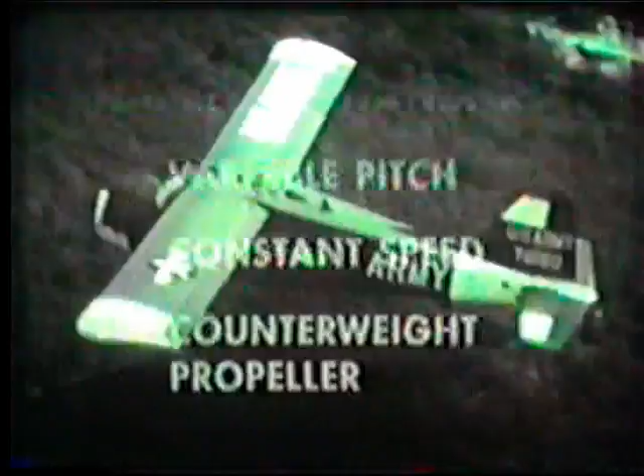The U-6 Beaver is a rugged aircraft with plenty of power for short-field barrier takeoffs. To make the best use of its power, the Beaver is equipped with a Hamilton Standard variable pitch, constant speed, counterweight propeller. First, let's learn why variable pitch is an advantage and how it works. Variable pitch means that the aviator can adjust the pitch of the propeller blades and thus control the amount of work it does.

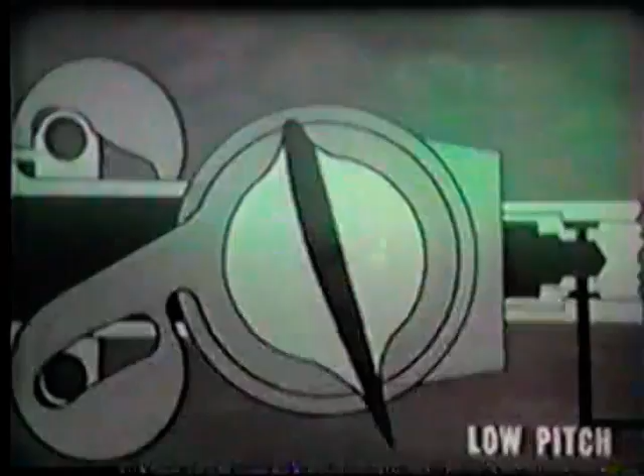With a variable pitch propeller, the Beaver can climb in low pitch or cruise in high pitch. Let's see how variable pitch makes possible efficient use of engine power. When the engine is operating, the blades can be adjusted from low to high pitch, or they can be set at any point between low and high pitch.

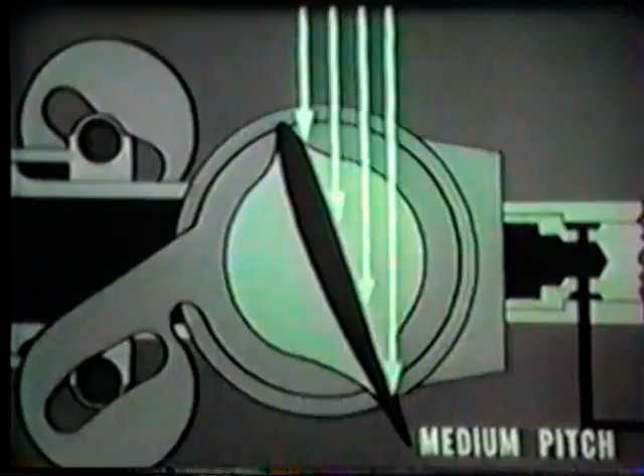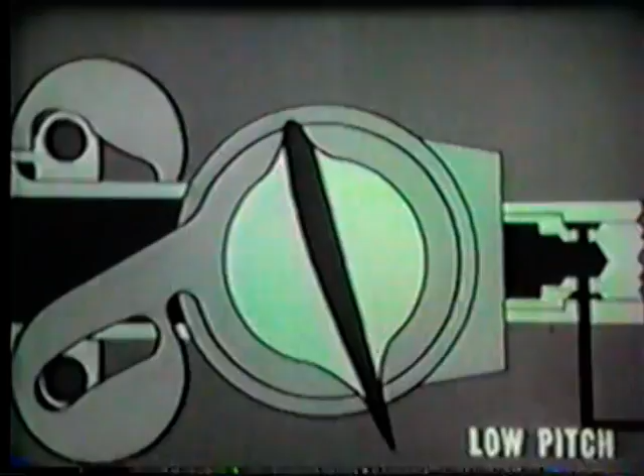When the propeller turns at medium pitch, the air offers a moderate amount of resistance to its movement. If the pitch is low, much less air resistance is offered. And with the blades at high pitch, much more air resistance must be overcome by the blades.

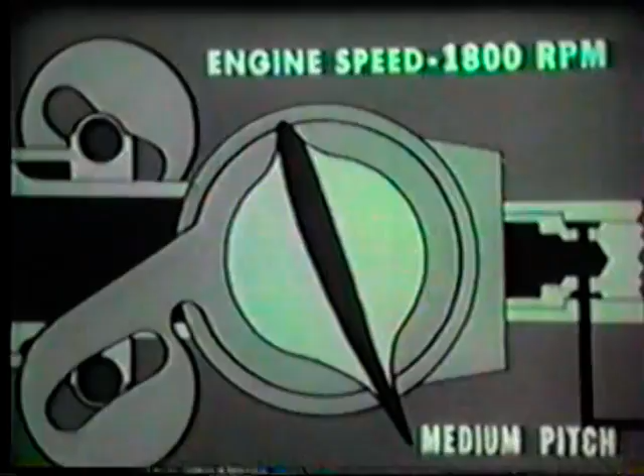Pitch and the resulting resistance of the air to the turning of the blades affects the horsepower output of the engine. With pitch at medium, our engine speed is 1800 RPM. Now, if the pitch is increased to high so that more air resistance must be overcome, the engine speed decreases since the engine must do more work at the same throttle setting.

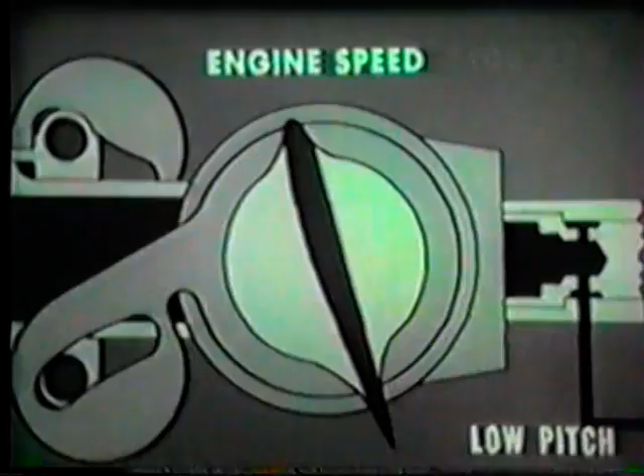With the blades at low pitch, engine RPM increases since the power plant has less work to do at the same throttle setting. The best way to remember how variable pitch is used is to compare it with a vehicle transmission. When climbing a hill, low gear is used to keep engine RPM at a high level, which permits the engine to develop its full power.

When driving on level ground, high gear is used because there is less work to do, and RPM must be kept from going too high.

When a Beaver is climbing, low pitch is used so that engine RPM is high and power output is at its maximum. With a Beaver flying in a level attitude, high pitch is used since there is less work for the prop and the engine would over-rev in low pitch.

Remember this: at the same throttle setting, low pitch produces high RPM and high pitch produces low RPM. This is the key to how variable pitch is used. Now let's find out how it works.

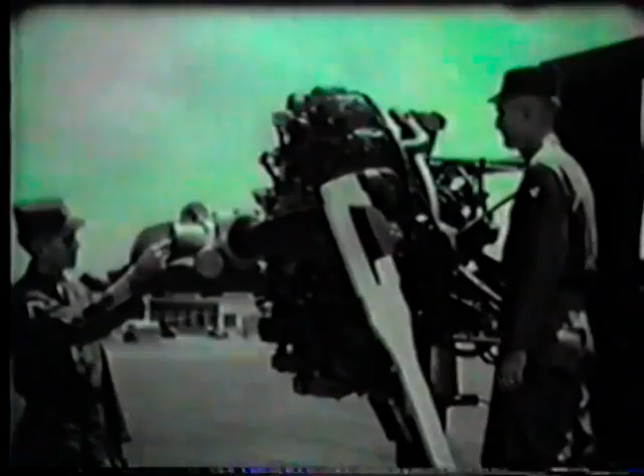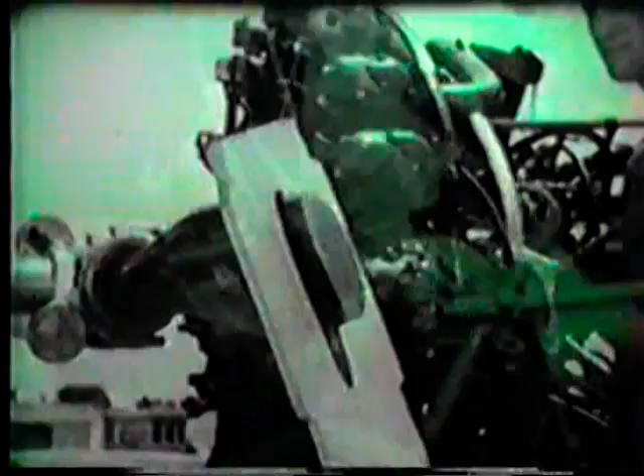On this engine mock-up, the propeller mechanism can be readily seen. There are only two parts: the propeller itself, and on the rear accessory case, the constant speed control, which is commonly called the governor. This governor is geared to the engine.

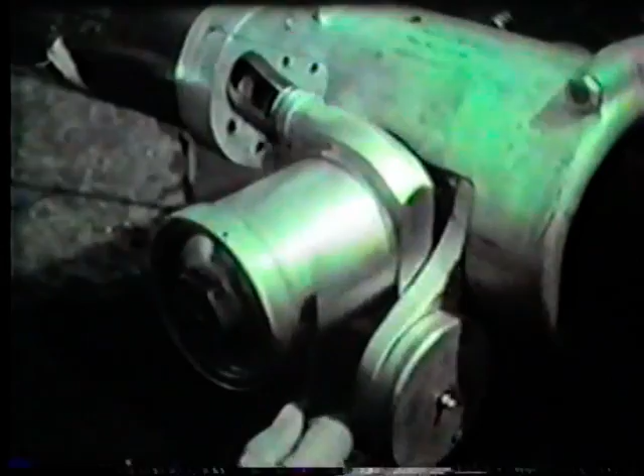Using a blade turning device, we can see what happens when blade pitch is changed. As the blades move to low pitch, this cylinder moves outward, and these counterweights are drawn closer to the cylinder. When the blades move to high pitch, the counterweights move away from the cylinder, pulling the cylinder in.

Two types of forces operate the propeller. Hydraulic force moves the cylinder out, pulling the counterweights in and turning the blades to low pitch. As the hydraulic force is released, centrifugal force of the whirling counterweights pulls the cylinder in and turns the blades to high pitch.

Here is how the combination of hydraulic and centrifugal force operates. The cylinder moves the counterweights by means of short shafts and bearings, which ride in slots in the counterweight brackets. The counterweight brackets are in turn linked to the blades so that as the counterweights move, the blade pitch is changed.

Oil is forced into the cylinder, moving it outward. As it moves, the shafts and bearings ride in the slots in the counterweights, pulling the counterweights in and overcoming the centrifugal force which tends to pull them out. As the weights move in, the blades are turned from high pitch to low pitch. Hydraulic force has overcome centrifugal force.

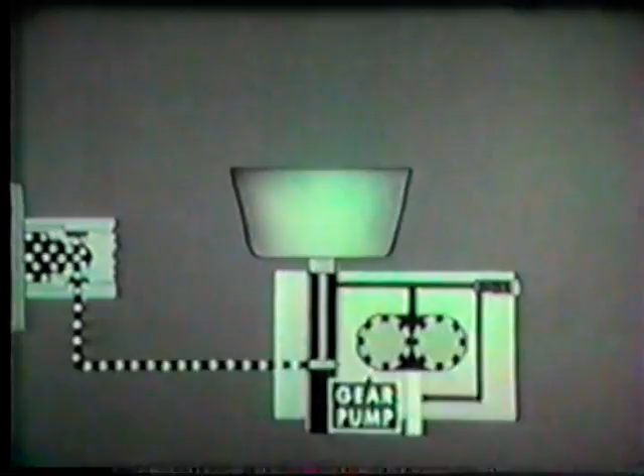Now let's examine the pump and valve mechanism of the governor, which controls the flow of oil to the cylinder. Oil is delivered to the governor at engine oil pressure. In the governor, a gear pump raises the oil's pressure to approximately 180 pounds.

The high-pressure oil moves on to a pilot valve, which controls its flow to the propeller cylinder. When the pilot valve is closed, a relief valve prevents overpressure by allowing oil to escape back to the governor pump inlet. Here is how the pump and valves operate.

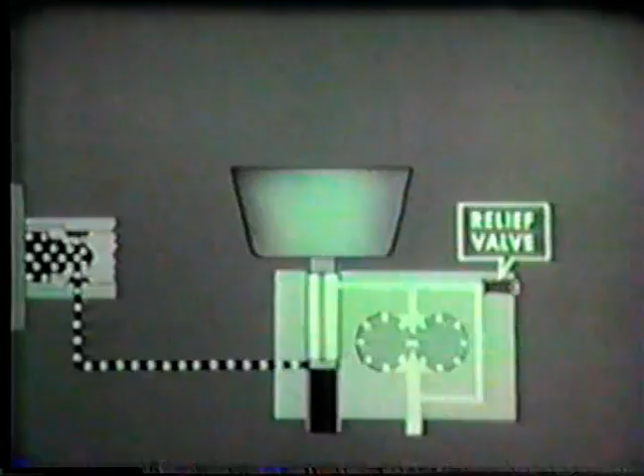With the pilot valve closed, oil does not flow into or out of the cylinder, and blade pitch remains unchanged.

When the pilot valve moves down, oil flows to the propeller cylinder. The relief valve closes.

As we have seen, when oil flows into the propeller cylinder, the cylinder moves out. The counterweights are pulled in and the blades move toward low pitch.

When the pilot valve moves up, past the closed position, oil flows out of the propeller cylinder and back through the governor to the engine. This is caused by centrifugal force on the counterweights, which move out and pull the cylinder in, forcing oil out of it.

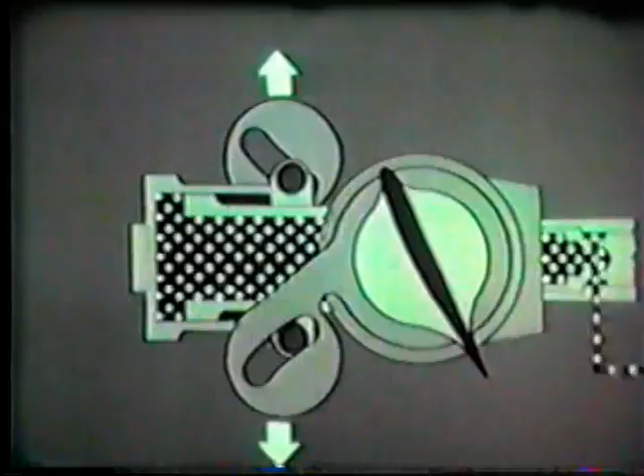Since the pilot valve, which in turn varies propeller pitch, can be controlled from the cockpit, we call the Hamilton Standard a variable pitch propeller.

Next, we will examine its second virtue, constant speed. What does constant speed mean? It means that once the propeller control is set for a specific engine speed, the speed will vary only slightly and momentarily, even though the plane makes a minor climb, or flies through turbulent air, or makes a shallow dive.

Any flight condition which would normally call for a slight throttle adjustment is automatically compensated for. This constant engine speed is a great advantage to the aviator.

In low-level flying, it is necessary to make many adjustments of attitude. However, with a constant speed propeller, the aviator does not have to worry about minor throttle adjustments. His mind is free to concentrate on his other flight controls.

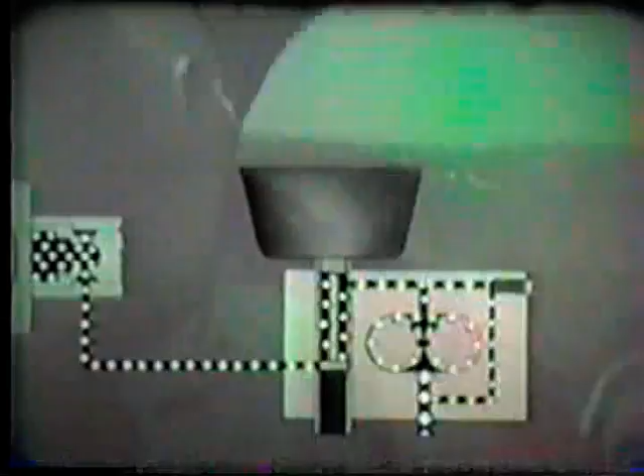We have seen how the pump and valve in the governor changes the propeller's pitch. Now let's add the parts which automatically make these changes.

First, there is a speeder spring assembly, which consists of a spring collar and is attached to the pilot valve shaft, and a spring above it, which puts tension on the pilot valve shaft.

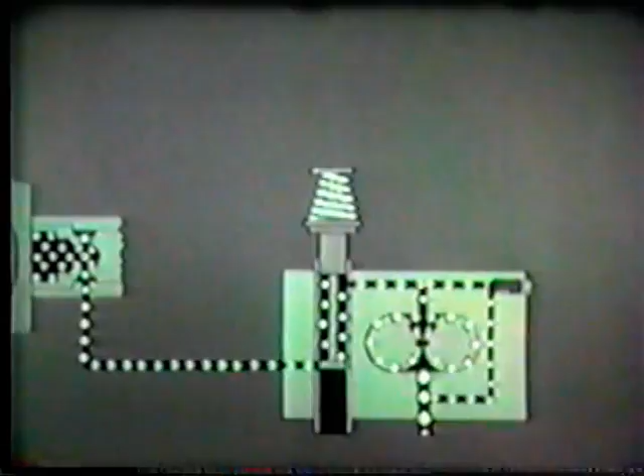Then there are the flyweights mounted outside the speeder spring assembly. Their inner arms rest against the underside of the outer race of the pilot valve bearings.

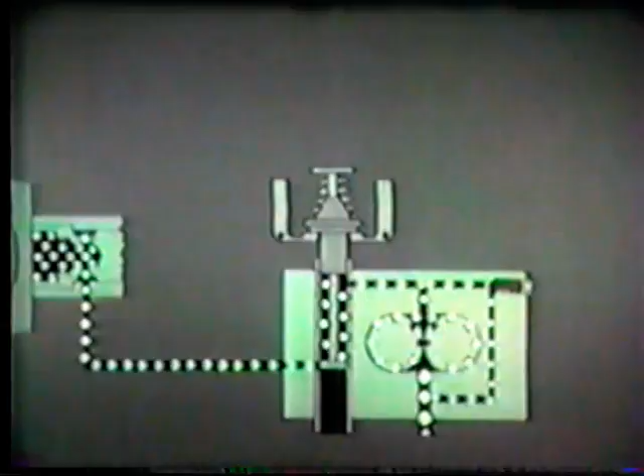In operation, the gear pump, outer race of bearings, and flyweights all revolve at the same speed. The centrifugal force of the whirling flyweights is pushing up against the speeder spring just enough to hold the pilot valve closed.

The condition we see here is called an on-speed condition. The propeller is holding pitch without variation. This means the beaver is flying straight and level.

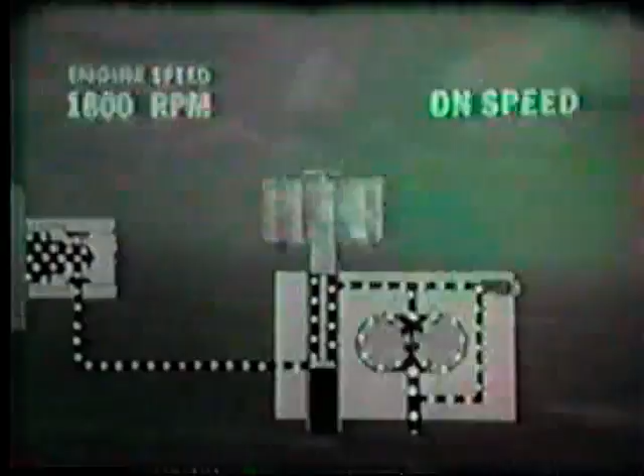Now it starts to climb slightly. Engine RPM starts to drop as the plane climbs. At the same time, the flyweights slow down and lose centrifugal force.

Since they do not push so hard against the speeder spring, the spring expands. The pilot valve moves down and oil is pumped to the propeller cylinder. The blades move to a slightly lower pitch.

Since at low pitch the propeller has less air resistance to overcome, the engine turns more easily and regains its original RPM. The flyweights also speed up, developing more centrifugal force. Once again, they compress the speeder spring and close the pilot valve.

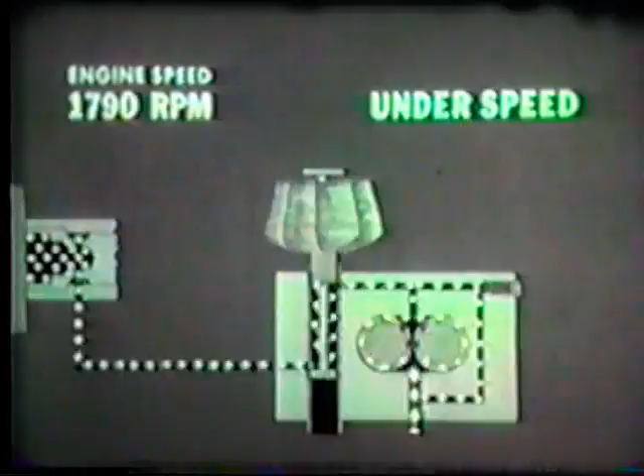The cycle we have just seen, with engine RPM dropping, pilot valve open, and oil flowing to the propeller, is called an underspeed condition, since the engine RPM falls below its original setting.

Now let's watch the action as the Beaver goes into a shallow dive. With the plane descending, there is less work for the engine to do, so it tends to gain RPM.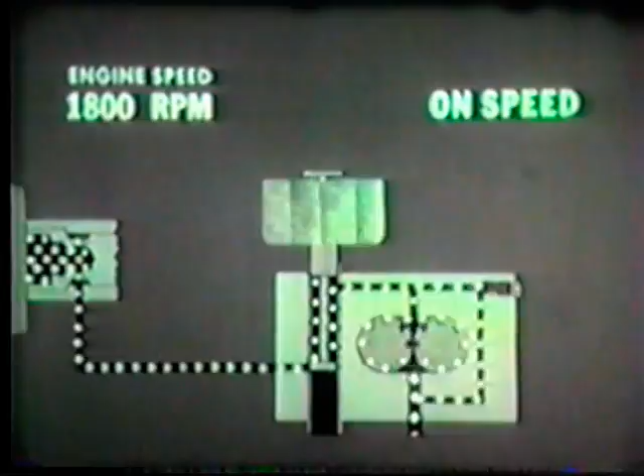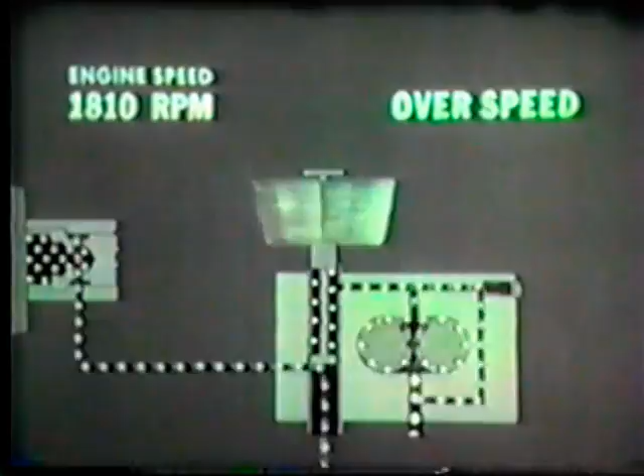Here is how the governor automatically returns the engine to its set speed. As engine RPM increases, governor speed also increases. Increased centrifugal force causes the flyweights to tip outward. Their inner legs push the speeder spring up and raise the pilot valve. Oil flows out of the propeller as the counterweights pull the cylinder in and turn the blades toward high pitch.

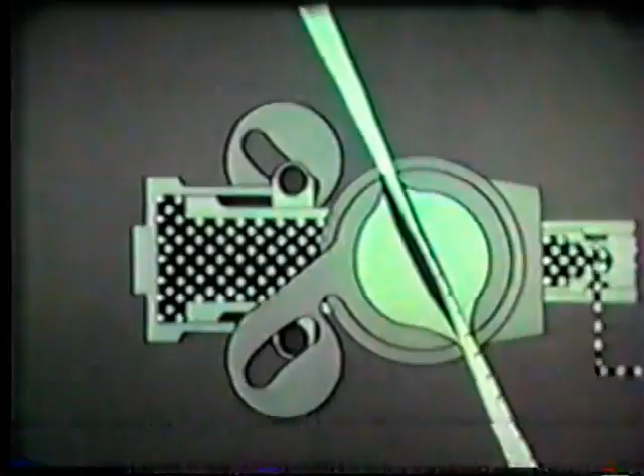At high pitch, the blades are harder to turn, so the engine slows down. As RPM decreases, the flyweights move in and the speeder spring closes the pilot valve. The condition we've just seen, with engine speed rising above the original setting and the governor draining oil from the propeller, is called an overspeed condition.

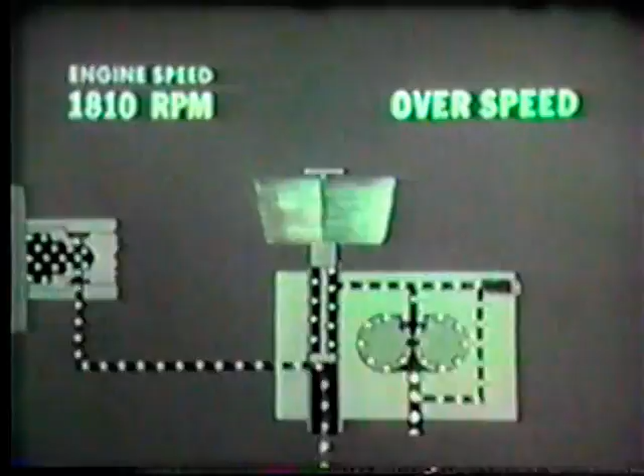In actual flight, the governor is constantly and very rapidly shifting from one condition to another, something like this. The propeller is continuously making minor changes of pitch so that engine speed is held constant within a very few RPM of its setting.

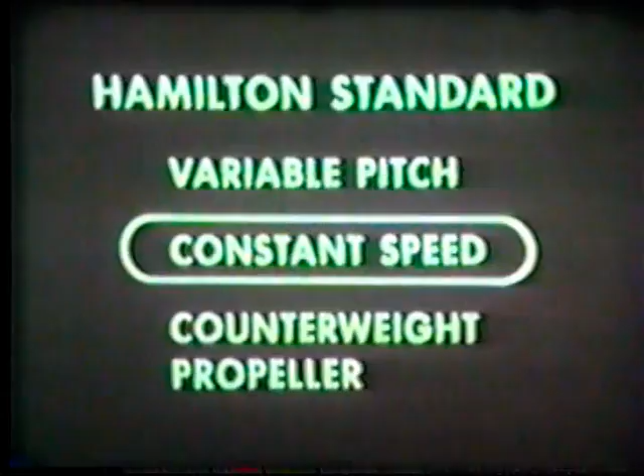This is the meaning of constant speed. Once set, the engine speed does not vary. To change engine speed, the aviator simply adjusts the propeller lever to a new setting, and the governor automatically and constantly corrects to maintain the new RPM.

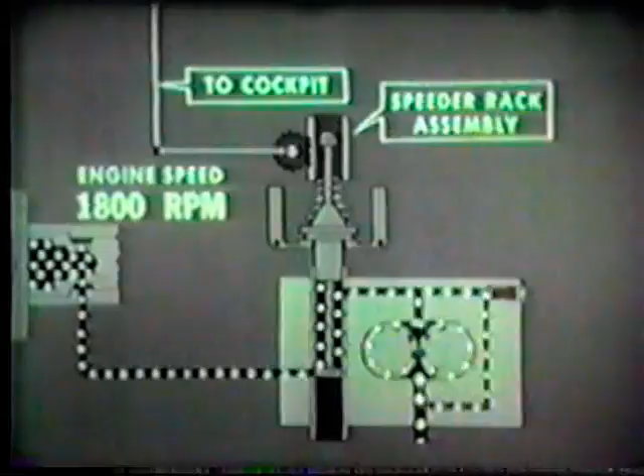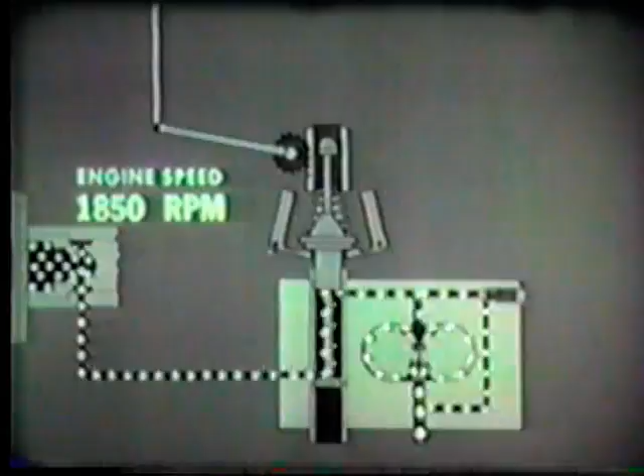The lever in the cockpit is linked to an adjusting device at the top of the speeder spring. This is called the speeder rack assembly. When the cockpit lever is moved, the speeder rack assembly changes the tension of the speeder spring. The governor adjusts the propeller's pitch until it finds the new RPM, then holds it constant despite minor changes in flight conditions.

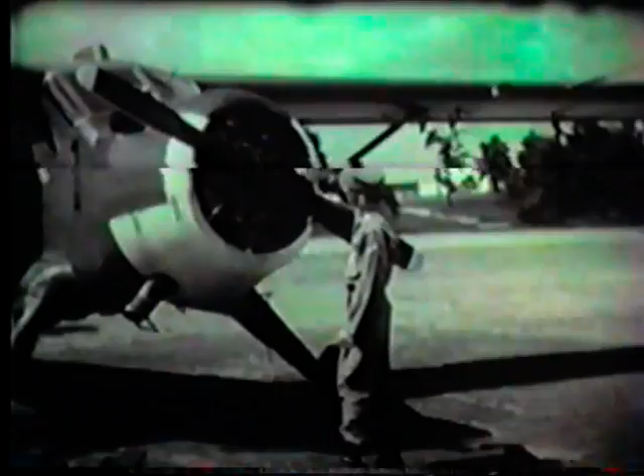This propeller requires very little maintenance. Here are the important points. During daily inspections, a check should be made for leaking oil seals. With the cylinder extended, look for rough spots and excess oil on the piston. A severe oil leak is easily detected since considerable oil will be thrown onto the windshield. When an oil seal or gasket leaks, they must be replaced.

Counterweights require frequent repacking with grease. Some counterweights have grease fittings, and a grease gun is used for repacking. If there are no grease fittings, repacking can be done by hand through the bearing shaft slots.

During periodic inspections, the counterweights must be disassembled and cleaned in solvent. Inspect the shafts for wear and straightness. The bearings and bearing races must be closely examined for scoring or pitting, especially if you are operating in a dusty area.

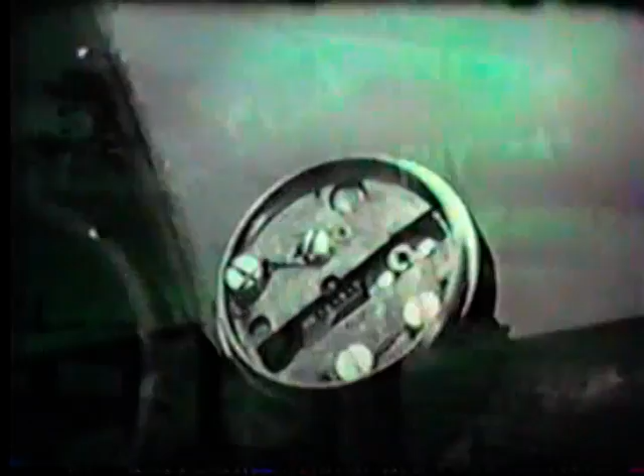When reassembling the counterweights, double-check the positioning of the counterweight stops. They must be positioned exactly as specified, or the propeller will be out of balance.

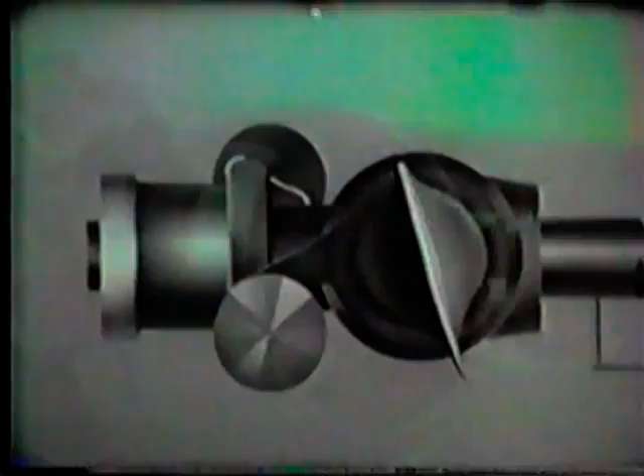Here is a caution on the operation of the propeller. Whenever the engine is stopped, the propeller must be at high pitch. There are 3 reasons for this. If the propeller is left at low pitch, the piston surface on which the cylinder rides is left uncovered and exposed to dust, grit, and corrosion.

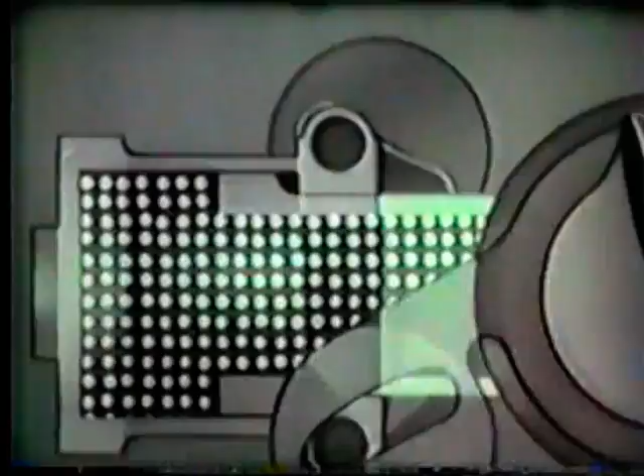Also, the cylinder is filled with oil, which will slowly seep back into the engine as the plane stands on the ramp. When the engine is restarted, the first oil pumped by the engine goes to the cylinder. The engine's connecting rods and bearings remain dry until the cylinder is filled.

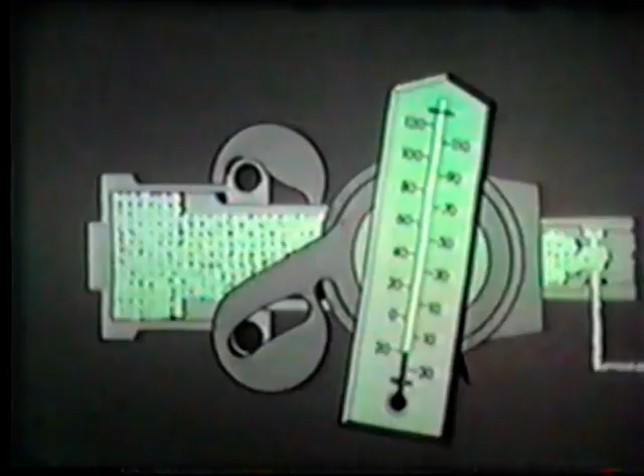Finally, in cold weather, the oil in the cylinder will congeal to a very heavy consistency, and the propeller's pitch change mechanism will not operate until it is thinned out.

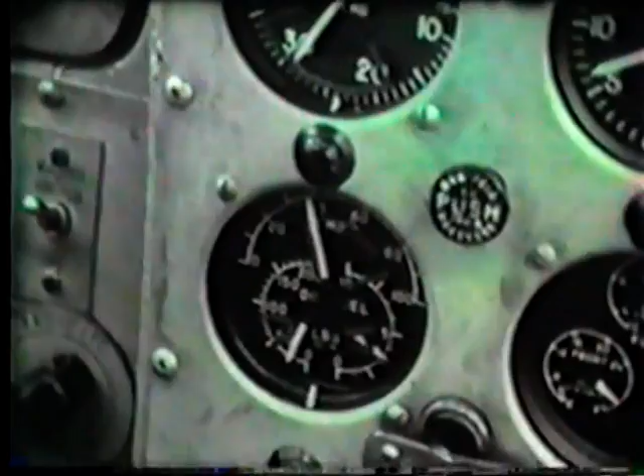Since the Beaver is always parked with the propeller at high pitch, it must be started in high. As the engine starts, watch the oil pressure and temperature. As soon as the oil pressure reaches 50 psi, the propeller setting may be moved to the low pitch position. However, the RPM should not be allowed to exceed 1,000 RPM until the oil temperature reaches 40 degrees centigrade.

The Hamilton Standard Variable Pitch Constant Speed Counterweight Propeller is simple mechanically and easy to maintain. It provides increased blade efficiency, reduced engine wear, savings in fuel consumption, and improved flight characteristics. But these virtues are only possible if you fully understand how it works, so that you can maintain it in top operating conditions.